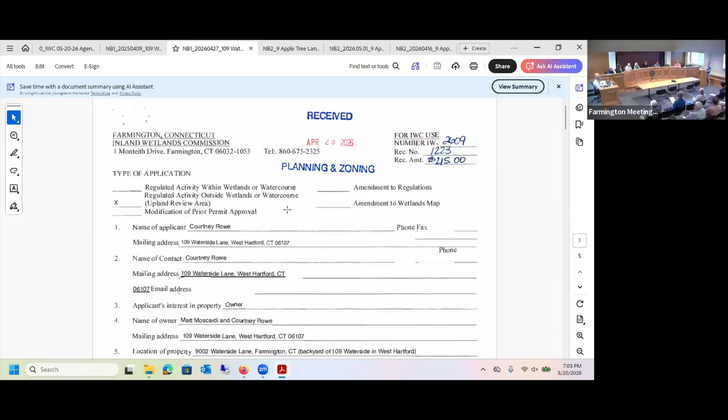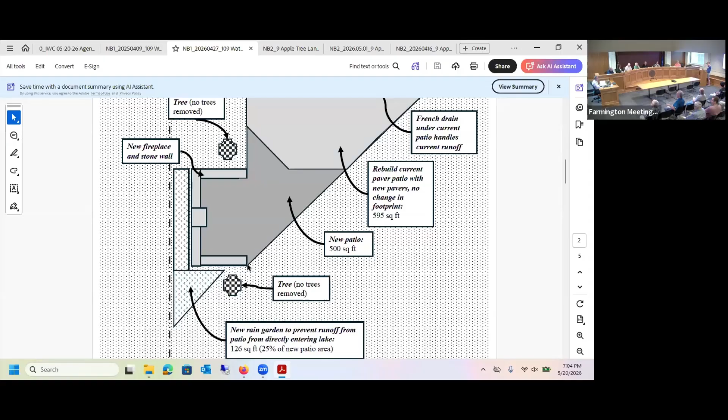I think everybody was here last time, but just as a quick refresher, we're adding about 500 square feet of patio, and we're putting in rain gardens to help with any drainage or erosion issues on the lake side of the patio. There's about 55-ish feet from the end of the patio to the lake, and the grade of the hill actually goes back towards the house, not towards the lake. There will be no trees removed, and nothing else has changed. There's been no changes to the plans or anything like that. I think I covered most of it.

Are you going to need any erosion control? We're going to put some hay bales just for the actual placement of the patio, but after that, no, I don't think so. And the rain garden, does that have a runoff? It runs off towards the house, and there's French drains at the house, so it spills going towards the street, away from the lake already. We're just using the existing drainage, we're not adding anything new except for the rain garden.

We'll poll the commissioners if they have any questions. We did accept this application at the previous meeting. So we'll start with Rich. I have no questions. Robert Eisner, actually I have a question for Bruce on the recommended items for consideration for the motion. The final design of the rain garden, is that still pending, or do we actually have a final design? No, I don't have a final design, all I have is the area. The applicant mentioned that they were working with UConn Co-op to come up with a plan.

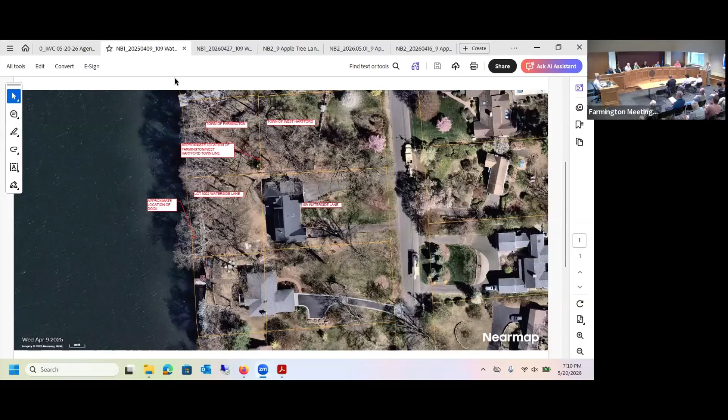We've been listening to all of the input, and as a result we are going to be proposing a significant change in the stormwater management design to include a biofiltration system, which Taylor is going to describe for you in a moment. We're also going to be proposing some other site changes that have been referred to as we've gone along, and that information is not yet incorporated in the plans you have before you. Bill Kenny is going to have some comments and also responses to some of the concerns that have been brought up regarding potential impacts on the vernal pool, on the wetlands, and on Batterson Park Pond.

As I said, the changes are going to require revisions to the plans, which we hope to complete next week, and then submit them for review by staff, by yourselves, and by all interested parties prior to your next meeting on June 3rd. For that reason, we wish to grant a continuance to close the public hearing until your meeting on June 3rd, 2026. We're actually beyond the statutory 35 days now, but we do have plenty of time left under the 65 days of continuances that we're able to grant, and we grant the continuance to your next meeting. So with that, I'll ask Taylor Capella to come up and explain some of the changes being made to the plans. Thank you.

Thank you. Thanks Bob. As Bob mentioned, my name is Taylor Capel, I'm with Solli Engineering, licensed civil engineer, state of Connecticut. Thank you for having us here again today.

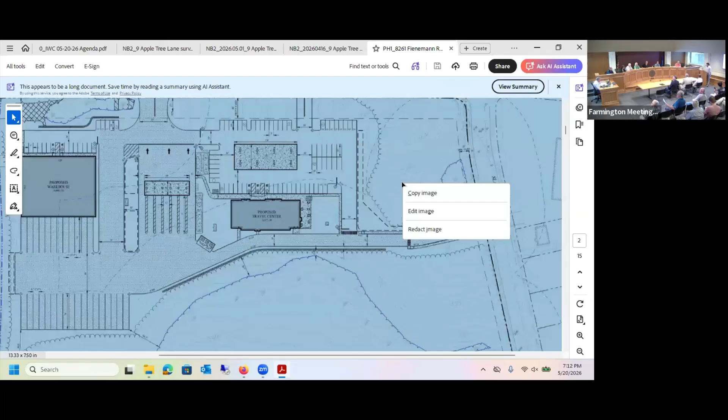One of the comments brought up at the last hearing was about the snow storage and what storm level the areas are designed for. These areas of storage can handle a 5-inch snowstorm, and that is how we designed the areas throughout the site. For any larger snowstorm events, we will utilize some additional parking spaces for additional storage, both behind the warehouse, several of the truck spaces, and for the travel center, some spots along Fienemann Road will be utilized. I want to reiterate that any of the snow melt could be contained within the stormwater management system we're putting in place - none of it will directly run off into the wetlands.

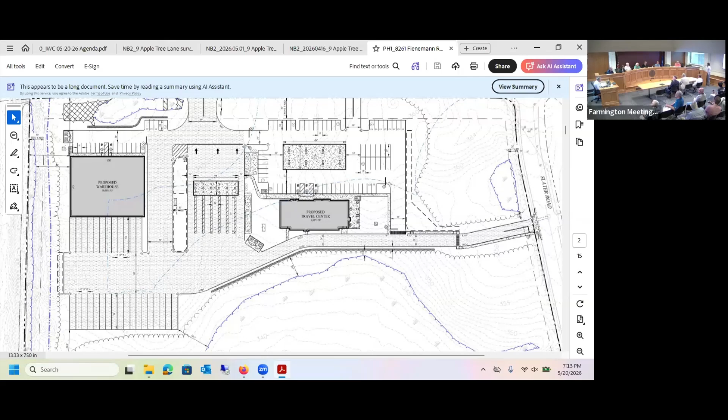Next slide, Bruce, please.

So now I'd like to get into some of the stormwater design changes that we are looking to implement. Some of the concerns that have been brought up at previous hearings were for dissolved pollutants within the water runoff. Originally we were looking to place 3 hydrodynamic separators on site: one before the southern underground retention system, and 2 ahead of the northern underground retention system.

The plan now is to look at something that will do a better job of treating those dissolved pollutants. As such, we are looking to implement these bioretention units, which are from Contech. They are called jellyfish filters. They will treat, similar to the hydros, the floatables, the trash, and total suspended solids they will capture. In addition, they will also treat for the dissolved pollutants.

Mainly, I know the dissolved metals, copper and zinc, were things that were brought up in past hearings. This is after discussions with several manufacturers. Contech is the unit most suitable to our site, given the shallow inverts of our system, as well as the ability to handle larger flows. These units will be replacing each of the 3 hydrodynamic separators we were previously proposing, and those areas are highlighted in yellow on the plan up on the screen currently.

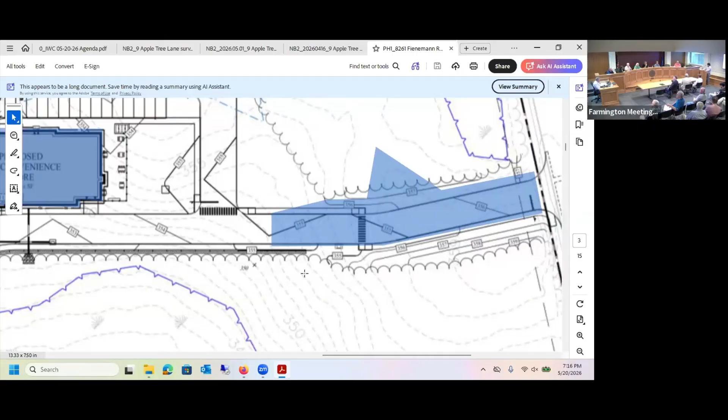Similarly, along Slater Road access drive, the front portion that is highlighted in blue, originally we had a single catch basin on the southern side, which tied into the rest of the system. The plan now is to replace that catch basin with a biofiltration tree vault, which will capture the runoff from the area highlighted in blue. It will treat the runoff at that point through a filter media, and then it will be outletted towards the vernal pool, again to contribute to the hydrology and help with the recharge of the vernal pool. I think that's all for that one.

If you could go to the next one, please, Bruce.

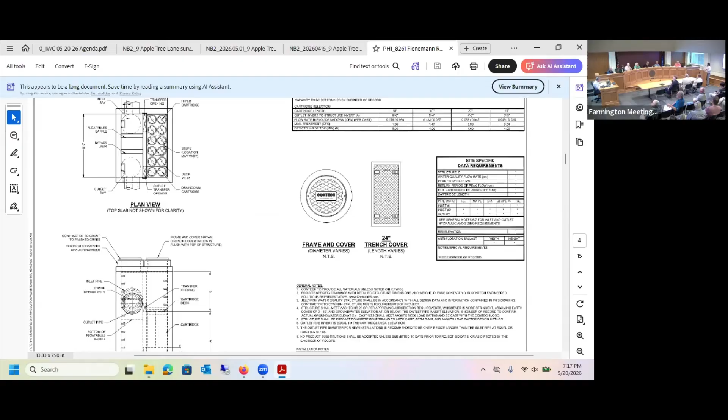Now I wanted to get into a little bit more of the specifics on the units we are looking at. Again, these are called jellyfish filters. The reason they're named that is because you have multiple cartridges that tend to look like jellyfish tentacles. This here on the screen is just one of their standard details. They have multiple sizes, and each one we are looking to use will be sized appropriately depending on where on the site it is.

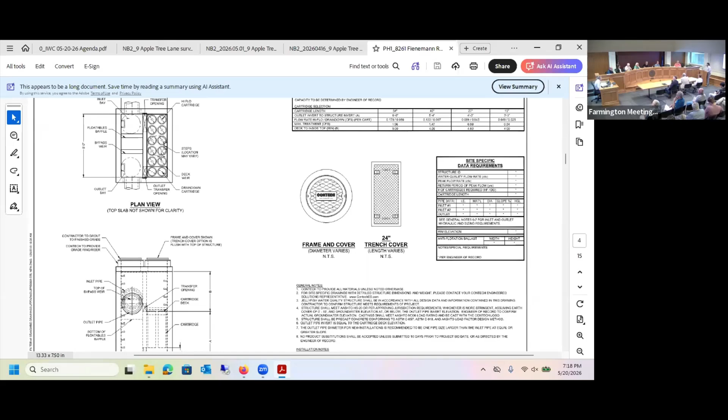Obviously, the one at the back will be the larger of the three, with two smaller units towards the northern underground retention system. These units are H20 load rated, so they are able to be placed below pavement, and in this application all three will be below pavement. As I said, they will all be sized appropriately to treat the water quality flow entering each respective unit. This represents the 90th percentile rainfall event, also known as the first flush, which has the highest concentration of pollutants. Each unit will be sized to accommodate those water quality flows, based on size as well as number of cartridges within the units.

As far as maintenance goes, maintenance is yearly. Similar to the hydros, you vac out any sediment, solids, and trash. The filters themselves can be rinsed, reused, and replaced back into the units.

As far as the units themselves, they are manufactured by Aero Concrete in Granby, Connecticut, so local here in the state. These have also been used in many places throughout the U.S. Northeast as well. One of the more prominent locations is outside Arthur Ashe Stadium in Queens, New York. That is one of the areas the rep we spoke to at Contech showed us, and how they were able to implement it there.

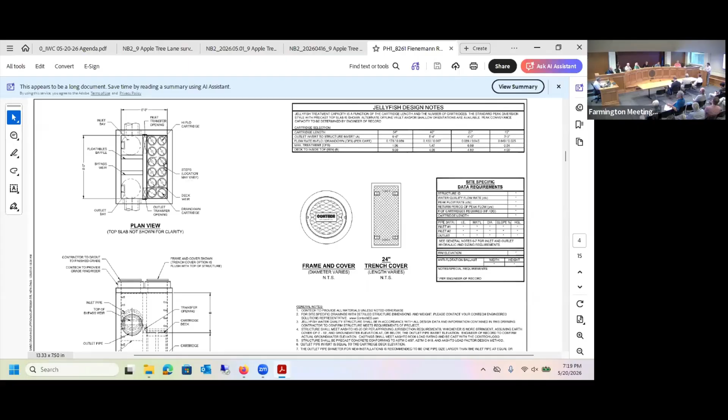On the next slide, it'll give a better depiction of how these units work. On the right-hand side is your inlet, which will be coming from different areas depending on where on the site. Water will flow into the unit itself, and you have a baffle wall that'll prevent the floatables and trash debris, maintaining them in that first area.

The water will then flow down into the bottom of the chamber and through that window towards the right. The cartridges are at the back end of this unit, and the water will flow up through them, being filtered to remove the dissolved pollutants through the cartridges. Once the water has flowed up through the cartridges, it'll come out the outlet side into a sump area, and as that fills up, it'll discharge out through the outlet.

There's a differential head drop of 6 inches between inlet and outlet. This allows for back filtration. Essentially, once the storm event is over, the water will flow back through the filters and settle down to help clean the filters so they don't stay submerged in water.

For any larger storm events, there's a path for it to overflow through where the yellow arrow is, and that will outlet. These will again be sized to accommodate the 10-year storm with the storm sewer systems we have in place.

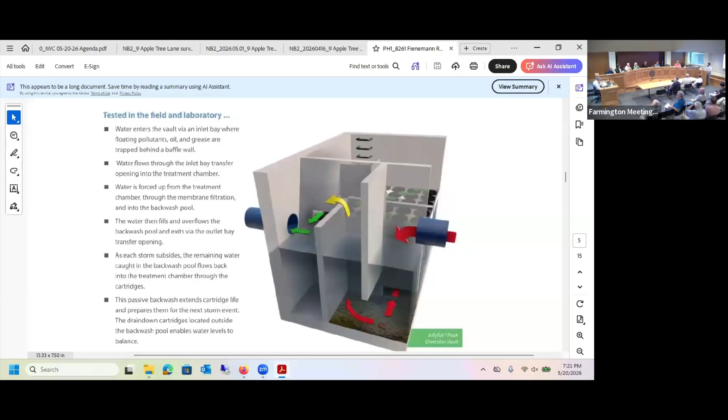On the next slide is the biofiltration tree unit we're looking to use, Tree Vault. This is a Filterra, another Contech product. The way this functions is in place of the catch basin, we'll have a curb inlet. Water will flow into this unit. There's a bed of mulch on top, and below that is a filter media which will remove phosphorus, dissolved pollutants, and hydrocarbons, and such.

As it flows down, it'll reach an underdrain, which will then be outletted, as I mentioned earlier, to help contribute to the vernal pool recharge. This is placed in an area toward the entrance of the Slater Road access drive, which is far removed from the fueling area. So this will be a good unit to capture some of that runoff, reducing what eventually gets to the filter units, in addition to helping recharge the vernal pool.

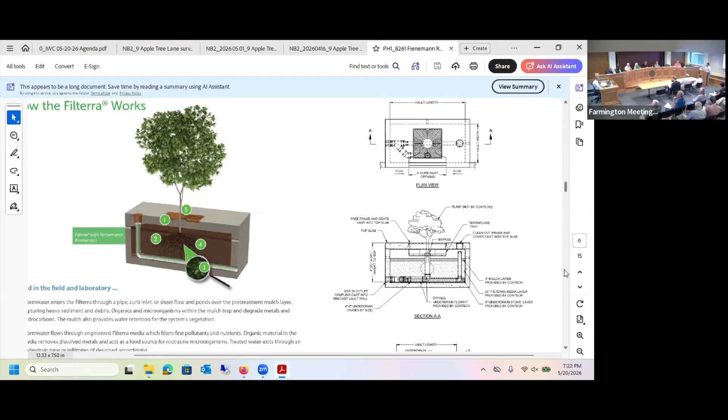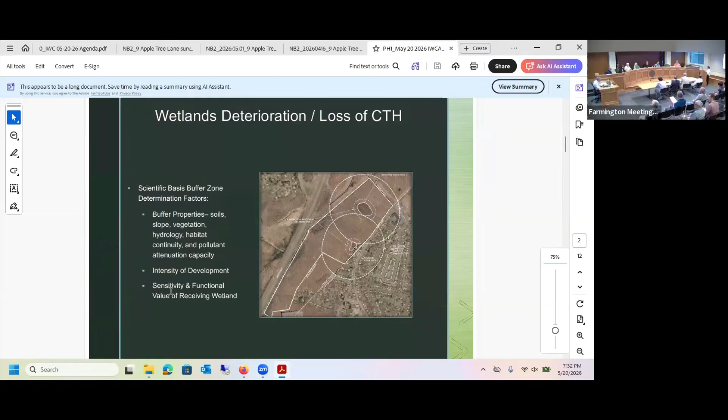Sigrid's reports detail the significance of buffer zones surrounding wetlands, including determinative factors such as buffer properties, intensity of development, and the sensitivity and functional value of the receiving wetland. These reports show the northern wetland is currently fully accessible and a high quality upland habitat, and that drier conditions resulting from watershed reduction and altered recharge patterns could lead to the loss of organic soils and biodiversity.

The figures Sigrid previously provided showed the shallow confining layer in the three soil types found in the drainage areas. It's important to keep in mind that shallow confining layers increase the importance of lateral groundwater discharge into the wetlands. So while we understand there might be some changes and reconfigurations to this plan, there might still be lateral groundwater impacts, which she could speak to today.

The planned development would result in a fundamental change from a groundwater-driven system to one dominated by episodic pollutant-laden runoff. The proposed development is reasonably likely to lead to biodiversity loss, including to spotted salamanders, wood frogs, and endangered plant species like lizard's tail. We've provided a copy of the DEEP form to complete a survey of lizard's tail population on the property. Other information to more appropriately assess the impact would include a site-specific hydrologic analysis and groundwater monitoring.

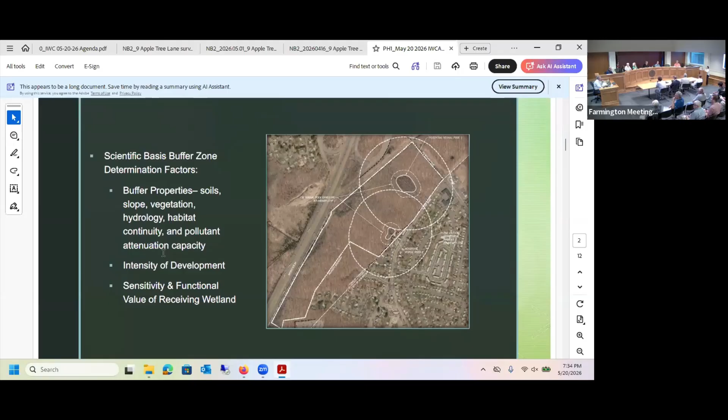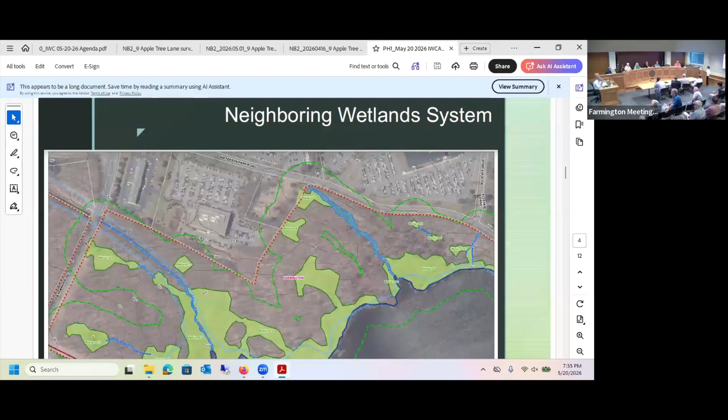These are some of the descriptions of the wetlands closest to Fienemann Road that were provided by BSC. I just wanted to highlight that these wetlands bordering Fienemann Road are similarly high functioning wetlands, mirroring similar observations that Bill Kenny and Associates had identified.

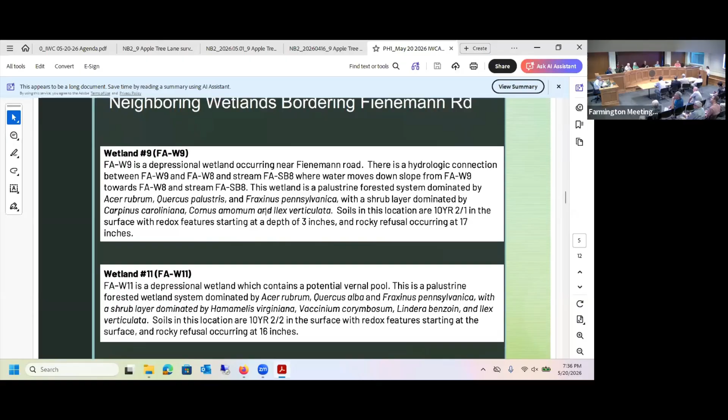The reporting for the permit for the Batterson Park Pond revitalization project addressed the critical importance the wetland system surrounding the ponds plays in pollution attenuation. As you might recall, that plan which obtained permit approval was intended to have high performance efficiencies, including 99.8% TSS removal, 57% phosphorus removal, and 36% nitrogen removal.

The current development plan would more likely lead to increased pollutant loading. I think we have to review the efficiencies of the jellyfish new system they've implemented, but it's important to know that those deficiencies could have impacts on the performance of the Batterson Park Pond revitalization project.

Also, if there happens to be a pollution event requiring remediation on this site, like what occurred last year at Noble's gas station across the street, the extraction of groundwater on this property would likely cause additional hydrological impacts to the wetlands and vernal pools.

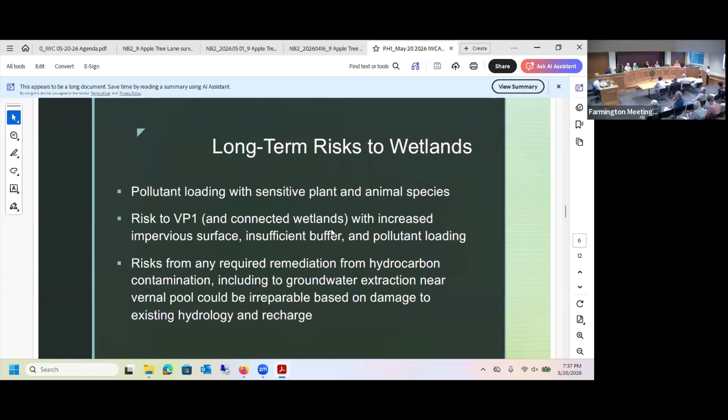The applicant's focus on the vernal pool watershed is missing the bigger picture, which is the Batterson Park Pond watershed. When DEEP set total maximum daily loads for Batterson Park Pond in 2004, the entire Batterson Park watershed was considered,

The 2004 analysis depended on an earlier report from Baystate Environmental Consultants to the city of Hartford, which recommended that municipalities take whatever steps they can to limit non-point source contributions in the respective watersheds and around Batterson Park Pond.

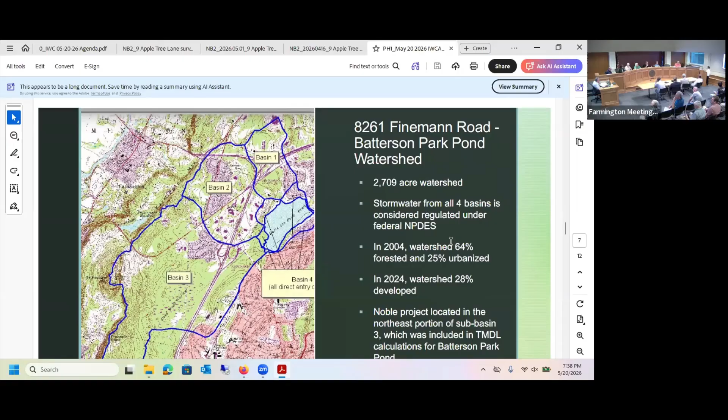You can go next slide.

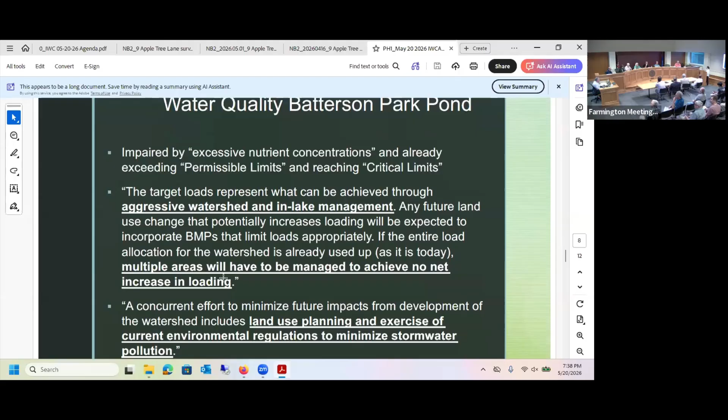So this is the 2004 analysis that discussed the permissible and critical limits, including nitrogen and phosphorus, and the DEEP report recommended aggressive watershed and in-lake management to achieve no net increase in loading.

Sorry, Bruce, I didn't realize you were advancing. I was reading too quickly. It's okay, you could go to the next one.

So the Bay State report also emphasized that the land most threatening to the water quality are closest to the pond.

Another finding from this report was that the Deadwood Swamp drainage accounts for 2/3 of the drainage coming to Batterson Park Pond. That's a pretty significant, sizable amount of drainage coming to the pond from this basin of the watershed. This would further emphasize the connection this forested property has to the water quality of the pond.

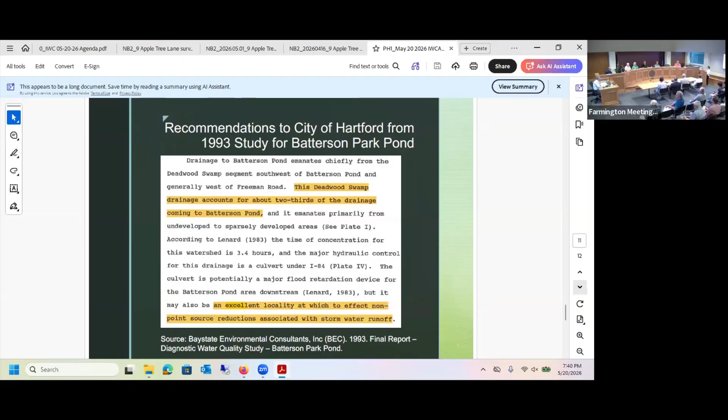So the applicant acknowledges that the proposed development will not increase stormwater runoff to Batterson Park Pond, but it's reasonable to assume that the development will increase pollutant loads. We talked about some dissolved pollutants that would still likely make it to Batterson Park Pond.

I also just want to state for the record, I know at the end of the last session there was a conversation about alleged encroachments. As an applicant in this proceeding, I'm limited in what I could present in the evidence about my property, since we're talking about the applicants. And I'm limited to what I put in my petition, which is not about my property.

But I will say that if there is concern about my shed, I hope that there's more concern about the large warehouse, the retaining wall that's super close to the vernal pool, and this intensive development. And on a personal note, I'm not against all development.

I think in my petition I even addressed that there should be some other feasible, prudent alternatives that should be considered. And so I just wanted to close with that, because I think putting a diesel fueling station operation this close to the pond that's already pretty compromised, as we've shown today, does not make sense. Thank you.

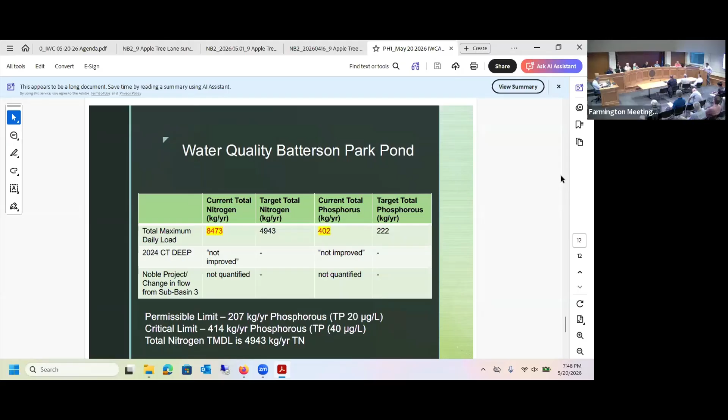Some nitrogen is particulate—you'd really expect it, as part of organic matter or whatever. Then there's ammonia, and there's nitrate. So the dissolved nitrate—do you have data for that, and can I look that up online? The removal rates, all these things? We could provide that in our response. Well, shouldn't that also be available from the manufacturer? I believe it probably is. Okay, so that's really—it sounds impressive.

But I also wanted to mention something that was part of my first report, and there's also a section in the buffer document about it. When you're talking about groundwater recharge, it's not just a matter of water quantity. When water moves through topsoil and the upper subsoil, it picks up dissolved organic matter, humic acids, and other kinds of dissolved organic matter, and it also picks up lots of cations—calcium, magnesium, manganese—and it's basically like a hydroponic fluid by the time it gets to the bottom of a hill, with a reasonably long flow path.

And that's why if you have these confining layers, instead of the vast majority of the water going down to a deep water table, it all stays relatively close to the surface, and it picks up a higher concentration—greater loading—so the resulting concentrations of calcium, magnesium, and humic acids are higher when it gets to the bottom. That's why you have more diverse plant communities, for example, the ironwood, the hornbeam, the maple-leaf viburnum, and all the spring ephemerals. Plant diversity is markedly higher at the base of a slope.

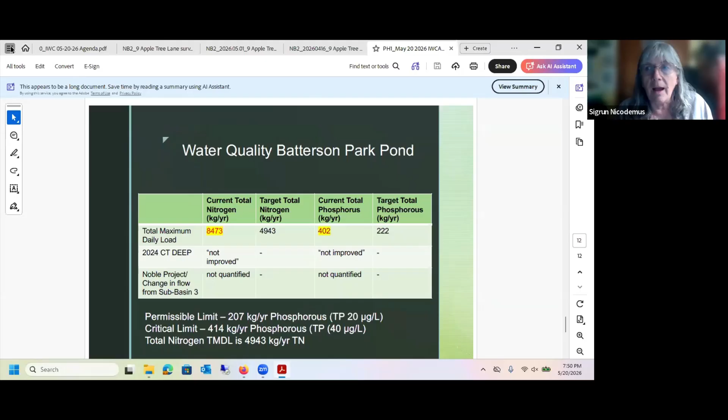So I actually remember, in the town, another case where we had a seepage-fed unusual wetland with deep organic matter and high plant diversity, and its watershed was being truncated. The solution was to put roof runoff in to make sure the same amount of water came in there. Well, I returned there 8 years later, and all the organic matter had oxidized, and it was now a ponded wetland—a pond.

Because the roof runoff does not have those constituents that the wetland needs. And this is something that botanists are aware of, but I don't think it's part of the training curriculum for inland wetland commissioners.

So I'm just bringing that up because the loss of a couple acres of slow, shallow runoff, groundwater discharge over the hard pan is going to change this wetland. And we do have a population of endangered species.

And I would like to ask if we can get a little more firsthand information about how large the occurrence of the lizard's tail is and what part of the vernal pool it's growing in.

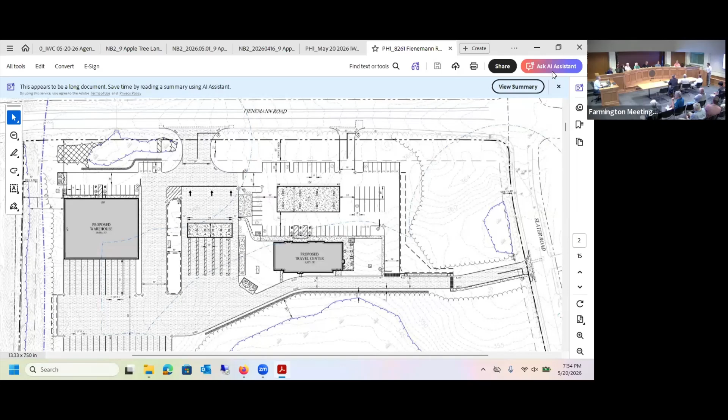But do you see a way that they could be? I'm similar, I'm struggling a bit to follow what your line of questioning is. But we can certainly respond in writing in terms of how we can handle the groundwater, I believe is the main. Well, let me just try.

I laid the groundwork by explaining that natural groundwater discharge over a confining layer through a shallow solum picks up minerals and dissolved organic matter and is enriched by the time it gets to the base of the hill. It's widely known that a whole suite of plants, including sugar maple and ironwood, and many herbaceous species, grow almost exclusively on the lower slope or in the wetlands.

When one puts a facility 20 feet from the wetland, you deprive the wetland and the remaining slope base community of the natural groundwater. This is an adverse impact that will affect the structure and the composition of the community, and it also results in a change in the soil characteristics of the wetland.

I hope maybe you can't answer it off the top of your head, I wouldn't think you'd be able to, but my question is, how can the applicant address this issue?

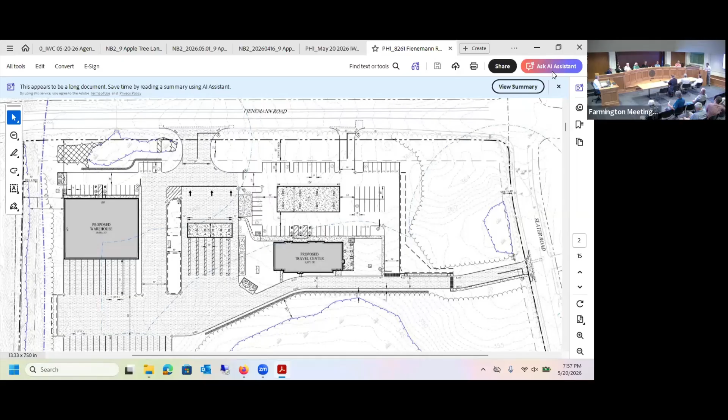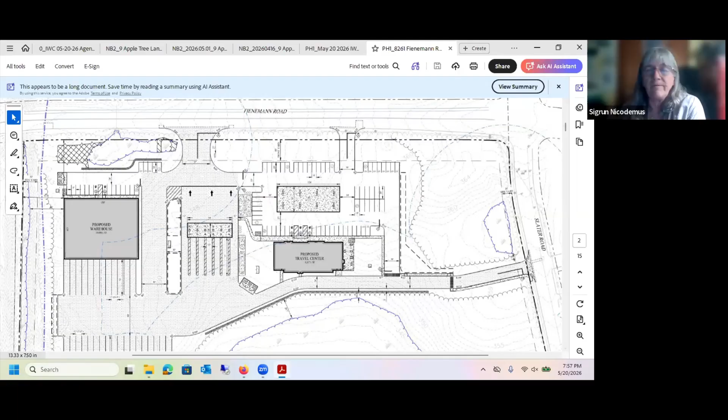What is the percent of the naturally forested watershed that will be removed? I think we should take out the street system off Slater Road, and could you come back with a percentage of intact forested watershed that's being removed?

We can attempt in our response, we can certainly look at that, it would be more meaningful, because the clean groundwater from the forest dilutes the pollutants that come in via the Slater Road outfall. Yes, we do have 250 feet of a flow path, and there's going to be a lot of attenuation.

Please. Excuse me? Thank you. I was trying to answer part of your question about removing completely the other part of the watershed, but I feel like you can't completely remove that as part of the analysis of this, because it is in fact leading to this vernal pool. So to try and completely disregard that in a way.

No, I just think you can make a second calculation of the percentage of natural forested watershed, which would be contributing the dissolved organics and the minerals.

Okay, understood. And also the document submitted early this morning talked about a way to analyze how effective the long flow path from the outfall to the vernal pool is currently at filtering the pollutant load that comes in via the outfall. You've already mapped the watershed there, so you can read that section of my report and include a narrative describing that.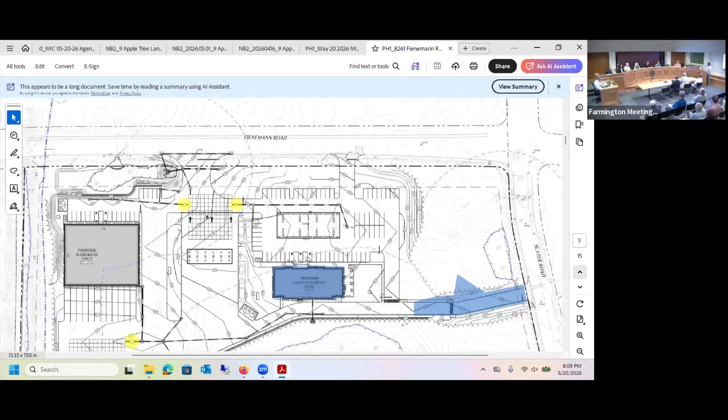Question I have is, Tyler, you covered a lot of information early on in your presentation. With the new design, is the roof drainage water being treated through the new spiral jellyfish filters? If you could address it from the podium, recap what the flow of the roof stormwater will be. Sure, no, the roof is not leading to the jellyfish filters. It is going to be outletted towards, as you can see there, the wetlands, treated at the discharge point, and then contributing to the recharge of the vernal pool.

Okay, so currently no treatment of the roof water is proposed, it's going to be treated at the point of discharge. We're still working through design as far as how it's going to come together. Okay, thank you. And while you're at the podium, sure.

I'm not overly familiar with the spiral jellyfish filtration system. Have you had direct experience using these systems in other projects you've managed? I have personally not. Again, that's why we've been in conversations with the manufacturer to learn as much as we can about these and make sure they're a relevant application for the site. Okay, one more question along those lines: what was the basis for choosing this technology over other stormwater treatment technologies?

So again, one of the concerns brought up in previous hearings by the commission was for the dissolved pollutants. The jellyfish filter itself allowed for the higher flows for the water quality flow we would be seeing, and some of the other manufacturers didn't quite reach that flow rate. The jellyfish filters do easily, they can exceed that, and we're not at the top range of that. Additionally, it was due to the depth of the inverts, where we were replacing the hydrodynamic separator with these units. A lot of the other manufacturers have a much deeper system, so in order to meet the shallow inverts, this was the best alternative.

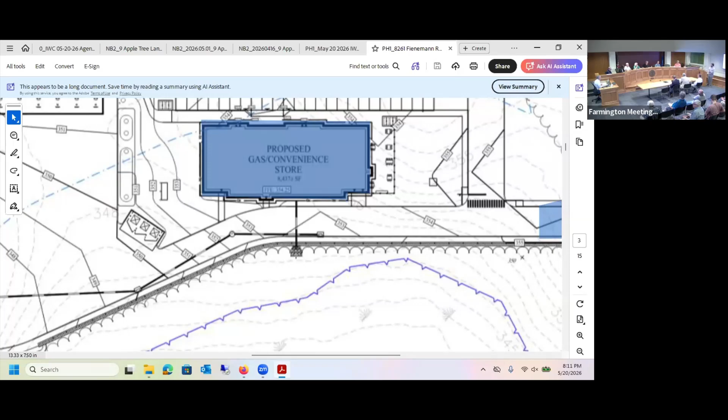Dave, I don't have any questions at this time. Mark Simpson.

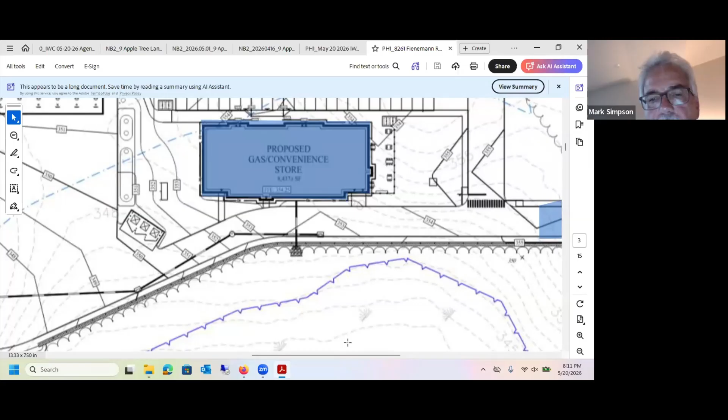Yes, Bruce, can you go to the right a little bit? I had a question about the roof leader and how it would just go to the right where the access road is.

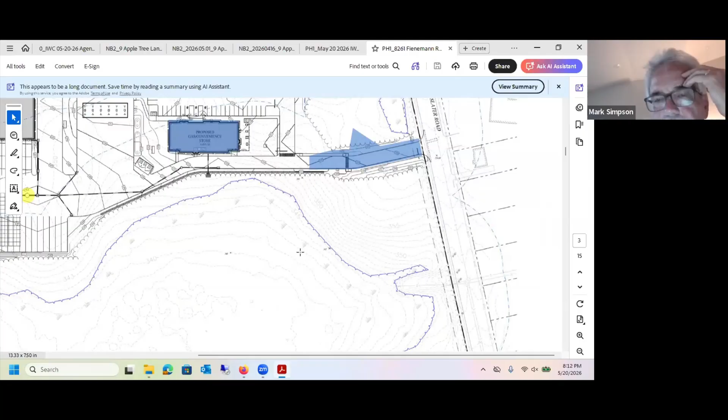My question is, vernal pool one seems to get most of its water flow from Slater Road, and it's been talked about how it comes and feeds into the side off Slater Road into the vernal pool directed that way. So there's wetlands above there where that access road is. Where does that water up there, vernal pool 2, which seems to be subsurface, get replenished? Is that water from the wetlands there and along Fienemann Road providing the water for vernal pool 2? Where's the water coming into there for vernal pool 2?

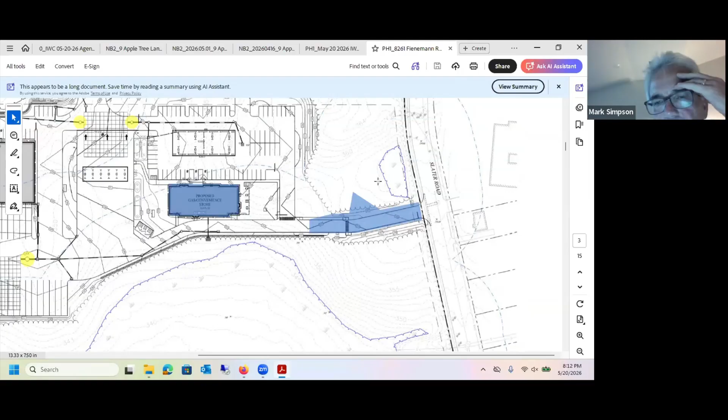This is Bill Kenny. We have looked closely at that wetland area physically, it looks like a classic vernal pool. It's an isolated depression, and we've reviewed it and monitored it, and it doesn't have standing water in it. I think the reason for that is that when Slater Road was developed, they cut off some of its watershed. It probably had maybe twice the size watershed, so it doesn't get the water it got historically before there was development in the area. So just want to say that, that it's an isolated depression.

Water could leave through the ground, and it can evaporate. Often that's the primary way for something like this. It doesn't appear it would rise to a height where it would spill over except maybe in a 500-year storm. At some point, if it rose 3 or 4 feet, it would spill over and flow down to the wetland with vernal pool 2. But based on what we've seen, it doesn't appear there's a watershed large enough to provide the water that would be needed, unless it was Noah's Ark.

So there could be some groundwater moving through there. Without doing borings, we can't tell if there's a change in the bedrock topography that prevents groundwater from moving laterally from that location to the wetlands. Some groundwater might be moving that way, but we can't say for certain because of the lay of the land there.

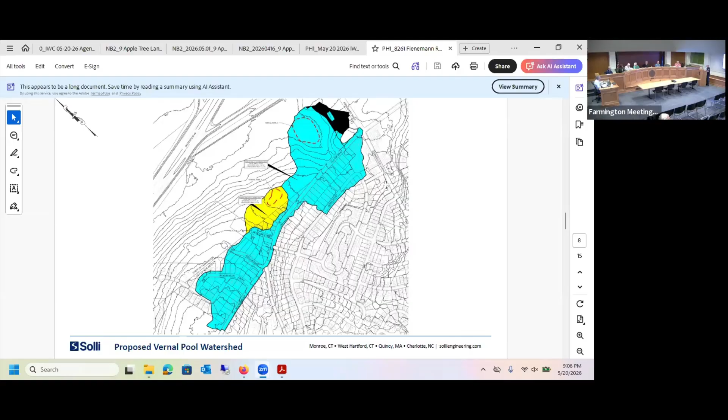How you doing? How you doing? All right, just let him bring up the plan view. Give me a second.

Okay, hold on, can we? All right, let's take the meeting outside, please. Excuse us, we're trying to. We got to move the meeting, there's something going on here. Thank you.

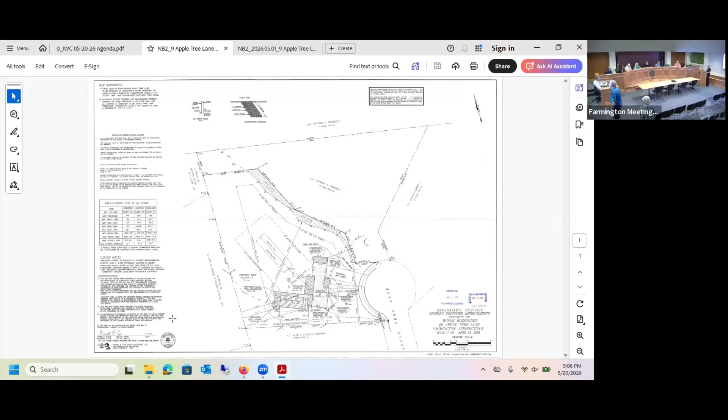We had the site walk, and then I think at this point we were talking about the driveway. Is there going to be an additional, like an updated plan, or are we just going by the same plan? No, we're going by the same plan. Okay, I think the questions we had, based on the previous meeting as well as the site walk, were about the driveway. We were talking about how that was going to be pitched, and then we wanted to talk about a schedule for the replanting of any of those plants that were from the previous approval.

All right, have you been in contact with the soil scientist? I talked to George and he told me that the best planting time is at the end of September. Okay, is that for everything or is it a phased approach? Yeah, some things are planted at different schedules. There were different phases last time. So was George saying everything? He said the best time that's going to show affection is September, because right now if you plant them, the heat is going to kill what you plant, because it's too late. You've got to plant in September.

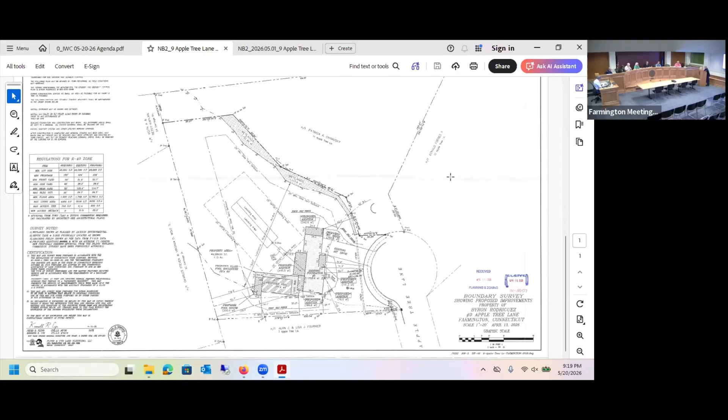Chair will entertain a motion to approve the application with the said agreement on the purchase and schedule of plants and the 2022 approval stipulations, and to work with town staff on the best driveway grade for that situation. So moved. Okay, thank you. And a second? Second. Made and seconded, to approve the application as stipulated. All those in favor say aye. Aye. Opposed? Abstain? Motion passes.

That's it. Okay. Next public hearing, JBS Developers. Thank you for your patience.

Absolutely. Should I read the notice? Oh yes, we're going to read the notice.

Town of Farmington Inland Wetlands Commission. Notice is hereby given that the Inland Wetlands Commission will hold a hybrid in-person and online public hearing on Wednesday, May 20th, 2026 at 7 PM in the Town Hall Annex, 1 Monteith Drive, Council Chambers, on the following application: JBS Developers LLC, application for regulated activity within a wetland upland review area for a proposed construction of 18 housing units, a detention basin, roadway and grading at 598 Plainville Avenue. Interested parties are encouraged to participate in this hybrid public hearing. Participation in person is at 1 Monteith Drive, Town Hall Annex, Town Council Chambers, or online participation is via the link to the meeting on the Town of Farmington's website.

A copy of this proposal is also online at the Town of Farmington's website, or please call the Planning Department at Farmington Town Hall at 860-675-2325. Dated at Farmington, Connecticut, this 30th day of April, 2026. Inland Wetlands Commission, Ned Stachin, Chair.

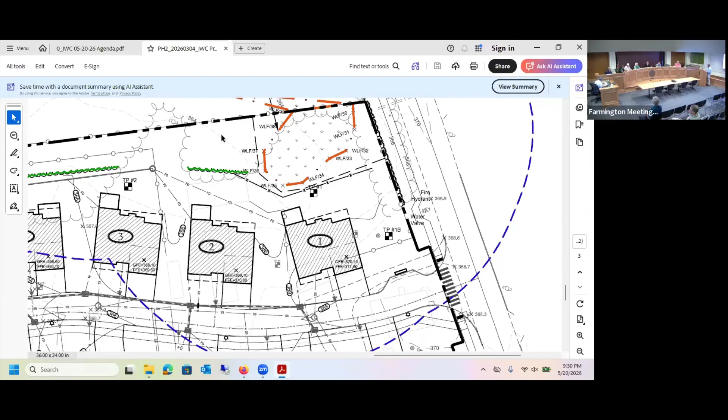What's the conservation easement border going to be on the back property past the retention? We usually put those low grade signposts or? Yep, we have the blue medallions that we could either use, existing trees and/or 4x4 pressure treated pipes or posts, or a combination of all.

I know that the town staff was going to put together a formal approval or denial for us, but next stage we'll go on. Is there anybody here from the public that would like to speak?

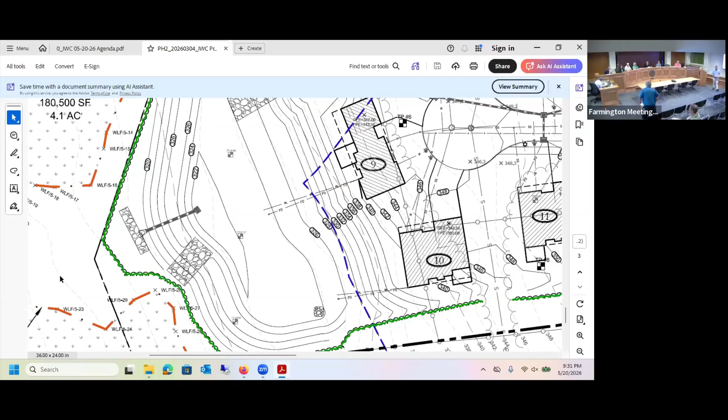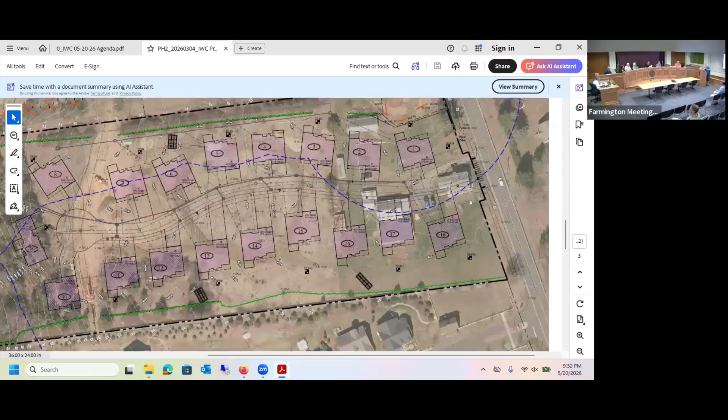Could you put that whole thing so I could see the whole picture? This right here, or I'm not understanding. So this whole thing, this is going to drain, all the water is going to go to the back of the property? And then what, then just leach into the wetlands? Okay.

As a resident, I'm not concerned, I'm just questioning, like, what's the grade? Is there water from these lawns and stuff going to come down and onto the Autumn Estates? Well, there is a retention pond at the end of the project.

Right, we'll go with that. Right, but there's 18 homes, and I mean, are they draining towards our property? There's a big... we'll let him explain a little. Okay, where's the general topography going to go? So if you look, we also have a small berm all along up in that edge, and that forces that water down into that. Okay.

So the green line indicated on this map is the proposed clearing limits, and it would effectively be a berm. So the existing grade at the tree line would let the grade down on the northern portion to create this. On the southern side, the existing grade at the tree line is higher, since we're not clearing anything, and as you work closer it comes back up, and that's what creates that.

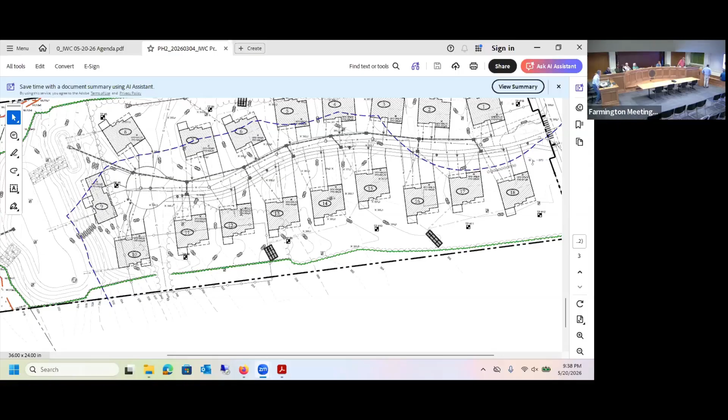One other question about the sewer - is the sewer line coming from their property, coming and joining into a sewer line on our property? So the sewer line for this project would connect to the town sewer system, which runs through both properties, correct. Now with all the development of Tanbark and this and Autumn Estates and the property below it, Farmington West Estates, is the sewer going to be able to handle all of this? The sewer should have adequate capacity, it should be sufficient. Yes, it is. Okay, thank you, that was one of my main questions.

Okay, I'm done. All right, I think I better take your time, have a seat and stay there as long as till the end of the meeting. We'll walk out with you, get my head together, okay.

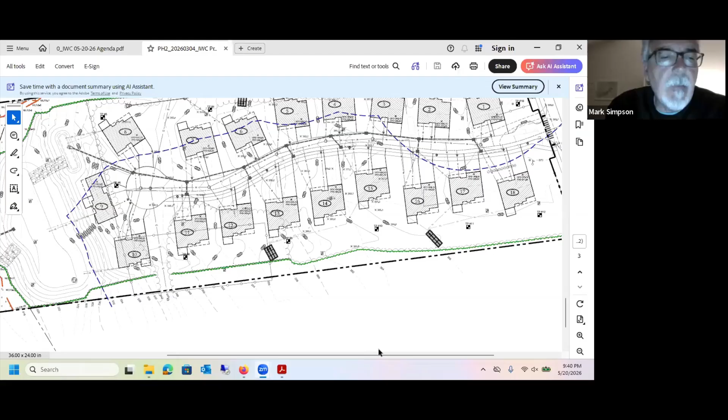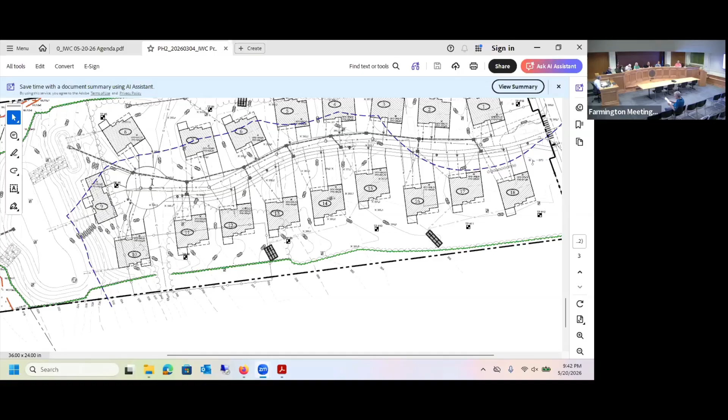All right. Okay. Yeah, and I got one other item, if you don't mind. It popped up during a discussion that we were having. Get over here again, give me one second to load it up.

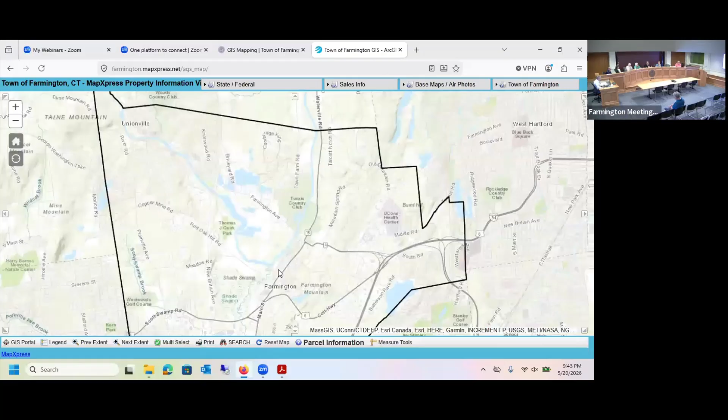There was a sign application that came in to planning and zoning, and as part of that, it's in the upland review area. So I wanted to chat with the commission under planner's report and get their thoughts on whether an application would be required or not. So let me get over there.

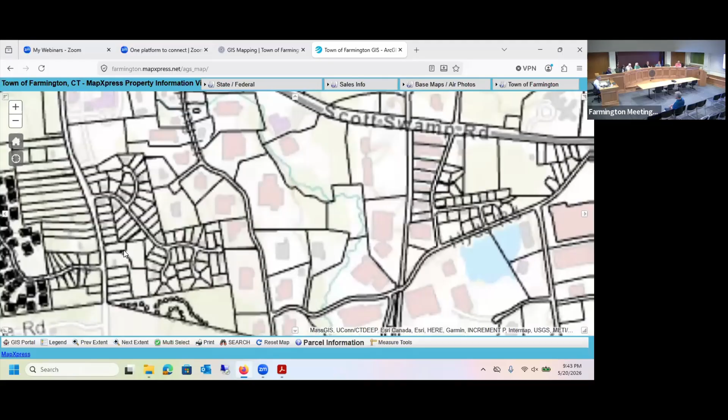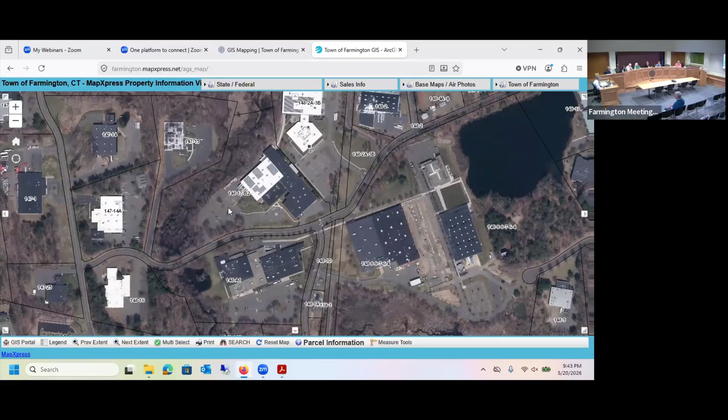It's for Burke Aerospace. So we've got Spring Lane here, Hyde Road is here, and Liebinger Way is here. So Trumpf and EBM are right over here. So Burke Aerospace is down in the back here. There's a very long driveway.

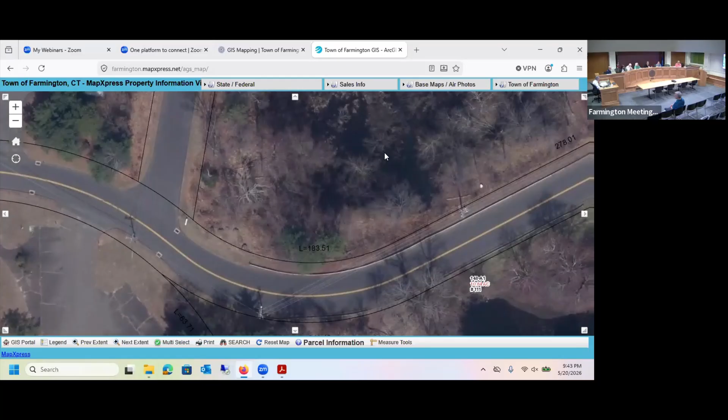The sign right now is in the town right-of-way. So as part of that, they need to kick it back into the property. This is all wetlands here, and this is lawn up along the back of the curb. I do have some pictures I took.

Are they using the same sign or are they building a bigger sign? No, it's a brand new sign. It's gonna be two posts. All right, give me one second, I'll load that up too.

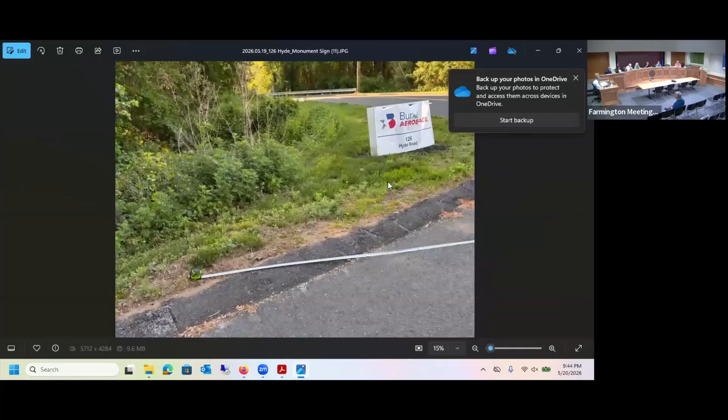All right, here we go. So here's where the existing sign is right now, so it would have to be pulled back into this area here, in this lawn area. So there it is now, pulling it back up into this upper end here.

I've told them, they're now looking at it to see where it's going to go, because if it pulls back, they're a little concerned. So the question here to the commission is, if they stay in the lawn area and don't do any tree clearing, would you want an upland review or an application? The sign is, I'll go back to the sign.

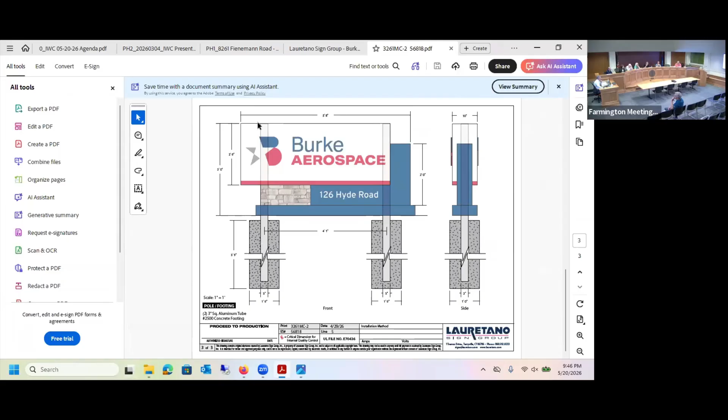So it's two foundations, 1 foot by 1 foot by 3 foot, 9 deep. So it's two concrete foundations, 12 by 12. So if you go back to the pictures, it would have to be somewhere up in here. All right, okay, by the end of this tape measure, so somewhere up in here.

So if they keep it up here, don't do any tree clearing, would the commission be okay with the staff just handling it as is? I think the staff can handle that if they're gonna stay within the grassy area. Okay, I think that, how does the rest of the commission feel? I concur. Sounds good, I'm good.

I'm kind of afraid that they're gonna put a sign there and then nobody's gonna be able to see it because of the vegetation. Well, it's funny that you say that, because when you come through here, this sight line, the bend on this road is so bad. There's been some maintaining of this clearing here for a while, so they really can't go without clearing the wetlands. There's no way you're going to improve that sight line anymore. So we've kicked it back to them, and it's a very difficult driveway. There's not many options to do it.

So they're going to come back to us, but as long as we're on the same page with staff, that if they put it in, there's no tree clearing, we'll put some erosion control in, and we'll take care of all that as long as we don't need an application. If they come back to me and say we're doing something much larger, then I'm going to kick them into an application and send it to you guys.

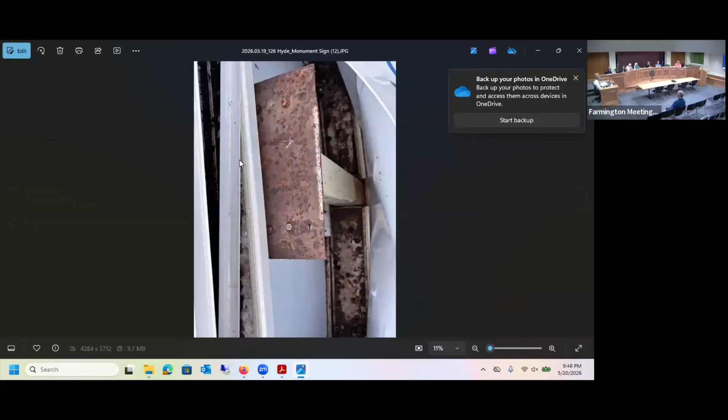Well, it's an old sign. It's been going over hands a few times, and it's an old metal sign, and here it's only got one little I-beam stuck in the ground. It's just some old metal panels, and that's like a vinyl wrap on it, because they changed their name like six months ago or something, so it's a temporary vinyl wrap around it.

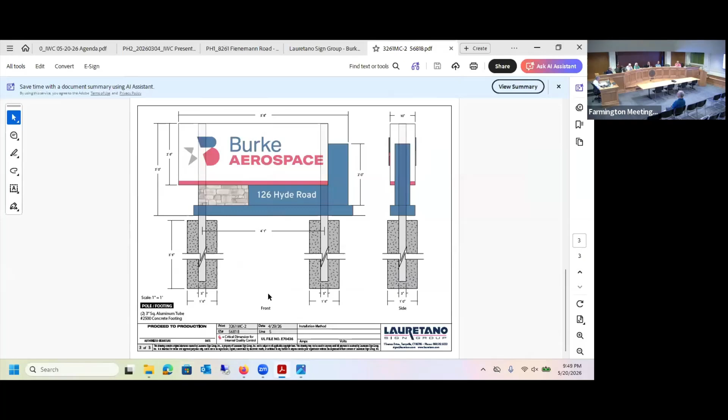So are they keeping the same design of the sign, or? No, it's different, it's right here. This is the design here. So it's going to have these two foundations. Shut this down here and zoom in a little bit. So it's going to have these two foundations with a support, with a faux stone in this larger panel here, so three foot by almost six feet, five foot eight.

Okay, are we good, you think? Printed on both sides? Yep. Okay, and is TPZ okay with that? Not yet. It's going to TPZ, but I don't want it to go to TPZ if you guys don't look at it first. I don't want them to kick it out and say you got to go to wetlands. So if we've had this conversation.

If they're in the grass area, I think town staff can handle it. All right.

Okay, and the only other thing I want to go over quickly, if you don't mind, we talked a little bit about the Noble application. So we're continuing to June 3rd. Okay, so hopefully we'll see if it can get closed or not.

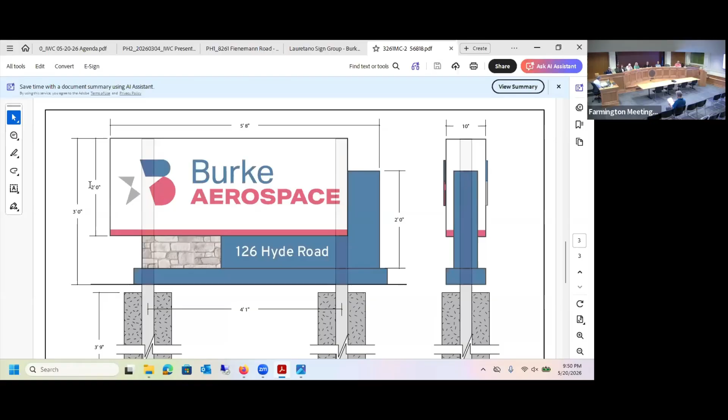I've had long discussions with the town attorney. So the town attorney will be available for either June 3rd or June 17th. I want to have him either here or call in, in case the commission has some last minute questions on a procedural item. So the intention is that we're going to develop a written sequence of how this has to go in terms of voting on the intervener, and then actually voting on the application. So there's going to be a little bit of a sequence with that.

So he'll be here for that if the commission has any questions or concerns, but I'll have that procedure done. They'll review it, we're going to review it, and then we'll get that out to everybody so that they can read right through it.

And also, if the commission doesn't mind, start thinking now about thoughts you would have for some kind of provisions for a resolution. My thought is if we close it on the 3rd, we're not going to vote on the 3rd, the earliest we'll be able to vote is the 17th. So I'd like to have a resolution sent over to you guys early enough that you can review it, and I want to include as many of your comments and thoughts in there as possible.

And then I'll send it out to everybody, and they could comment, take this out or put this in, add this, just like we've done in the past. So start thinking about those, because once we close the hearing, I'm going to want to start getting some input. Yeah, so after we close the hearing, no new information can come in, you can't ask a question you haven't asked yet or anything like that.

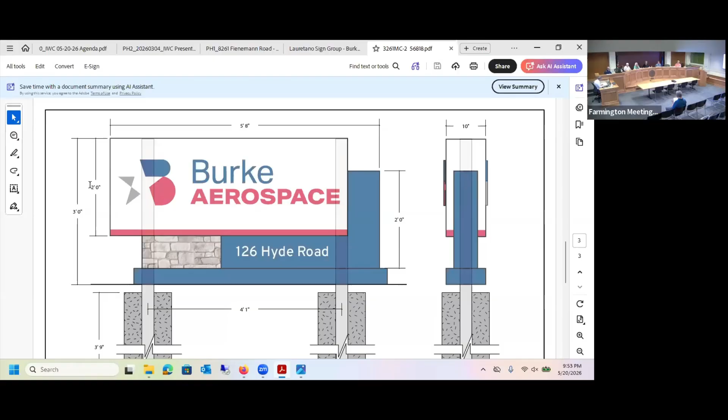That's it. The chair will entertain a motion to approve the minutes of May 6th Inland Wetlands Commission. So moved. Second. Motion made and seconded to approve the minutes of May 6th. All those in favor say aye. Aye. Opposed, abstained, motion passes. So we will close the Inland Wetlands Commission meeting at 9:54.

And open the Conservation Commission at 9:54. Because we're that efficient. All right, call the meeting to order.

Any planner's report? No, but what I did realize, and unfortunately I did forget to put this application on the agenda for conservation. So we can technically vote to add it on the agenda if we want, or wait till next meeting and discuss it then. But unfortunately, that would kick JBS out two more meetings. No, you're talking about the thing where we have to make a recommendation, the Conservation Commission. You're gonna fix that this year, right? Yes, I am, sir. Chair, I will take care of that.

Okay, so if anyone's ready to vote, if they feel fine, we can definitely do that. Or even to discuss it, we have to add it on the agenda. Bruce, is that a problem for notice? No, because it's not a public hearing. The Conservation Commission isn't a public hearing.

I forget how the recommendation works, that we forward to the Inland Wetlands Commission the report. Yes, you're forwarding a report, a referral from conservation. Commissioner Eisner is always great at those. Chair will entertain a motion - well, we got to vote to add it to the agenda first. Chair will entertain a motion to add to the Conservation Commission agenda an item to forward the application for - well, we're just gonna vote to add JBS to the agenda. So we'll do that first, then discuss it, then entertain a motion to add JBS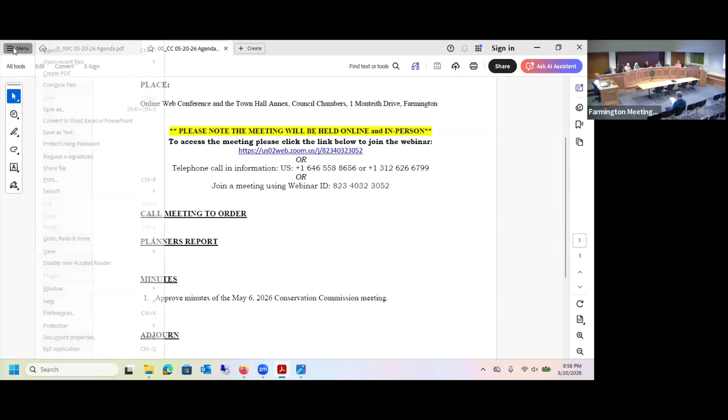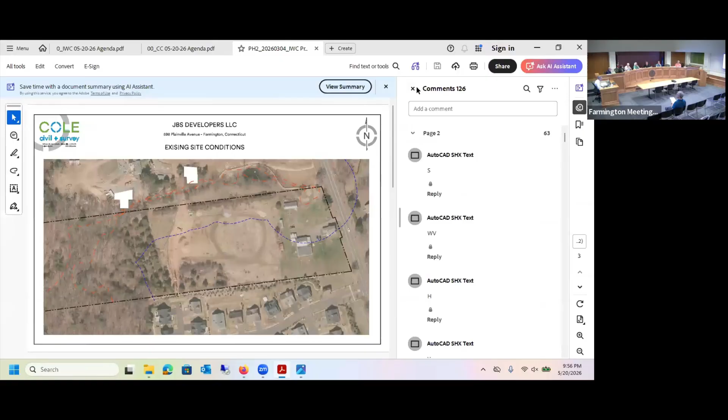So now, Chair will entertain a motion to have the Conservation Commission forward - say it again. The chair will entertain a motion for the Conservation Commission to forward to the Inland Wetlands Commission a recommendation, a referral. You're referring a recommendation to the commission regarding the conservation easement, the wetlands, suggesting the conservation easement behind lot one. Yeah, I think that makes sense with what we talked about today about putting a conservation easement on that wetland.

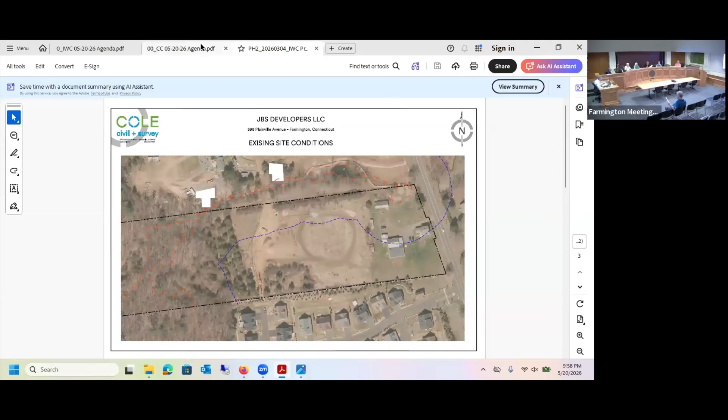So I need a motion for the Conservation Commission to send a referral of all the applicant's information to the Inland Wetlands Commission, including the conservation easement behind lot one. So moved. All right, and the second please. Second. Motion is made and seconded. All those in favor say aye. Aye. Opposed? Abstain? Motion passes.

All right, now we just need a motion to approve the minutes of May 6th. So moved. All right, motion and a second please. Second. Motion made and seconded to approve the minutes of May 6th. All those in favor say aye. Aye. Opposed? Abstain? Motion passes.

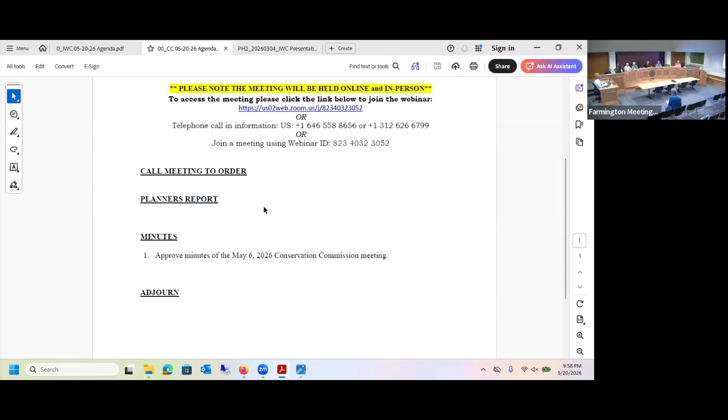Chair will entertain a motion to adjourn the Conservation Commission. Or I could just do that. I adjourn the Conservation Commission at 9:58.